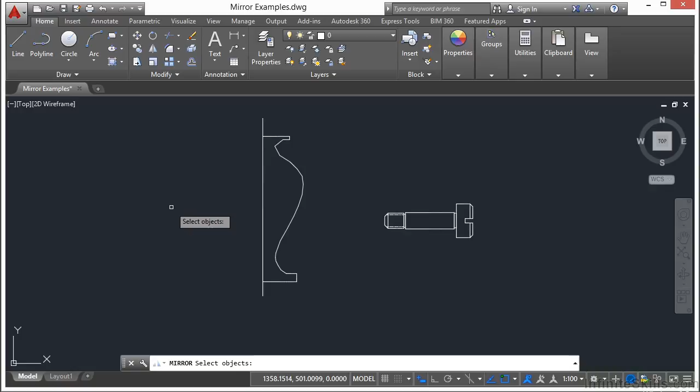Select your objects. We're going to select this half of the vase. You can pick one object or multiple objects. Press return. And now you have to create a mirror line. We have to pick two points. These points will create an imaginary line that your objects are going to be mirrored on.

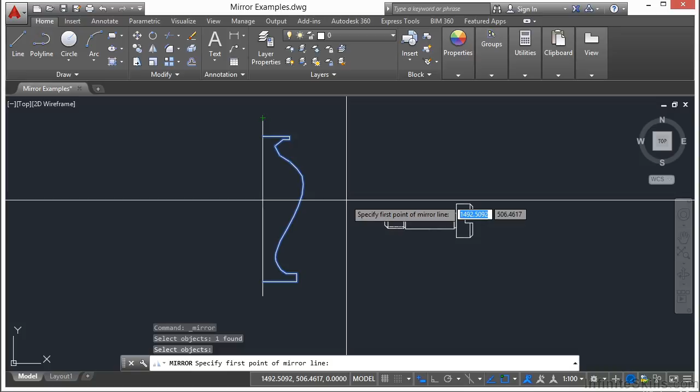In the case of the vase, I've put a construction line drawn in here already to help us out so we can see what we're doing. But you don't have to have a physical line drawn in there. Sometimes, though, it does help you get a better understanding of the process and to help better define exactly where you need to mirror about.

So in this case, I'm going to start off by selecting the top of the line. And as you can see here, I have a bit of a preview, and you can kind of see how this is all going to come into place. So I have my mirror line, which is that dash line. I just have to pick a second point.

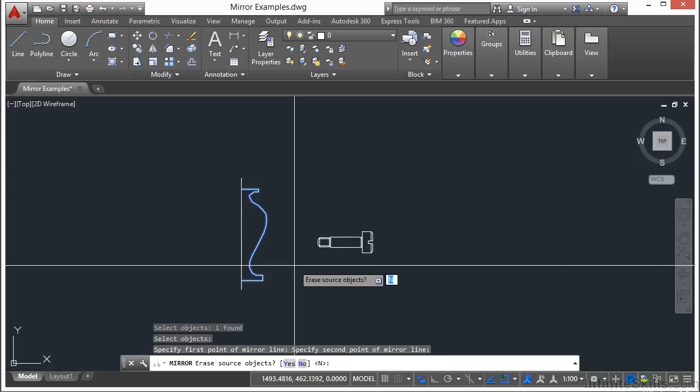So you can use the mirror command actually to be a sort of a rotate command in a way, and I've done that before. With this little preview, I'm going to now pick somewhere else along this line. And now you're given an option: if I want to erase the source object, that means this right half that I've selected will be gone, it'll delete that. I'm going to say no because I want to create my entire vase and make sure it's symmetrical. Just press enter, and here you go.

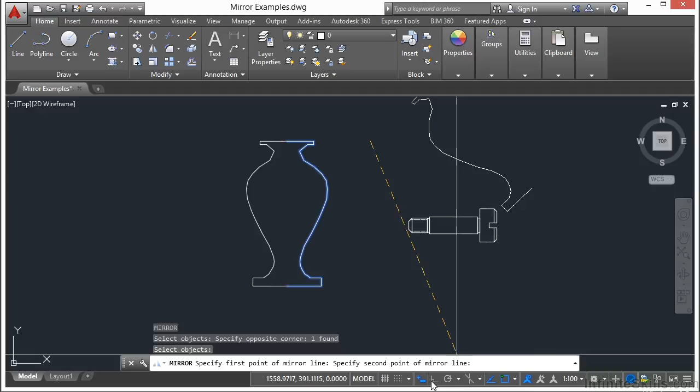Now if I select that line and delete it, you can get a better look. There's a vase, and it's completely symmetrical. Now if I start the mirror command again and select one of these halves, press enter, I can pick anywhere that I want, and it's going to mirror my object for me.

Now remember, I can turn on ortho, and that will help me lock in my line work to be completely vertical. And this will give you a few different options. So let's take a look here at this shoulder bolt or screw.

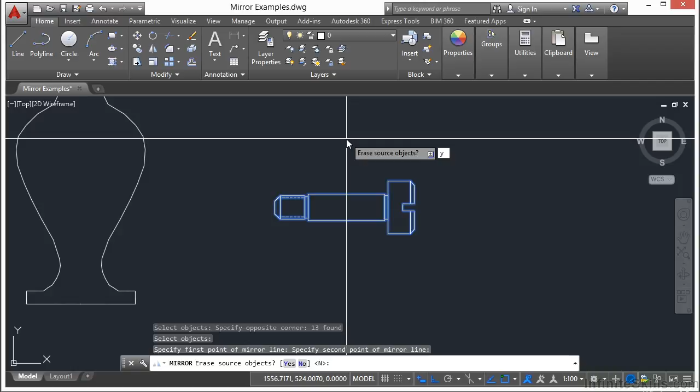This time I'm going to use the erase option. So I want the head of the bolt to be over here on the left. So I'm going to start the mirror command. I'm going to select all of these objects, press return, and I'm going to just pick the midpoint of this line. My ortho is on right now, so I can just come straight up like this, and I'm going to go up to the top.

And now I'm going to tell it yes to erase the source objects. And there you go. So I did a kind of rotation with the mirror command, I just flipped it over. So my old bolt is gone, and now my new one is facing the proper way.